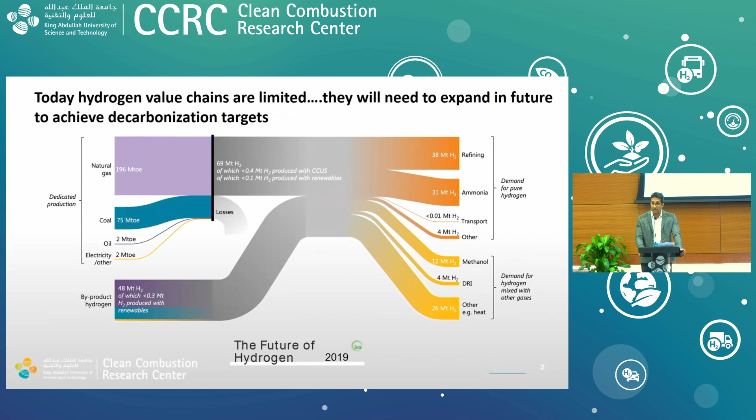In the future though, this ballpark 100 million tons of hydrogen used annually will expand significantly. Today, again 90 to 100 million tons, depending if you count the associated hydrogen with syngas or not, is expected to increase significantly over the next 3 decades, largely due to the need for various economies globally to reach net zero carbon emissions. In the next 10 years, maybe about 150 million tons, but by 2050, forecasts say upwards of 600 million tons of hydrogen. That's a huge amount of hydrogen.

This is the demand sectors where these will be used. Most of it is going to go to mobility - road, aviation, maritime, and other forms of transport - because they are the hardest to decarbonize. Ammonia industry will use slightly more; again this is existing ammonia for fertilizer applications, it does not include new applications of ammonia such as for power. And then things like industrial applications.

In Neom, we're mainly interested in how do we capture the market together with partner companies for the largest demand sectors. So it's going to be mobility, steel, and some industrial applications, not including heat - heat applications are not so much relevant in Saudi Arabia.

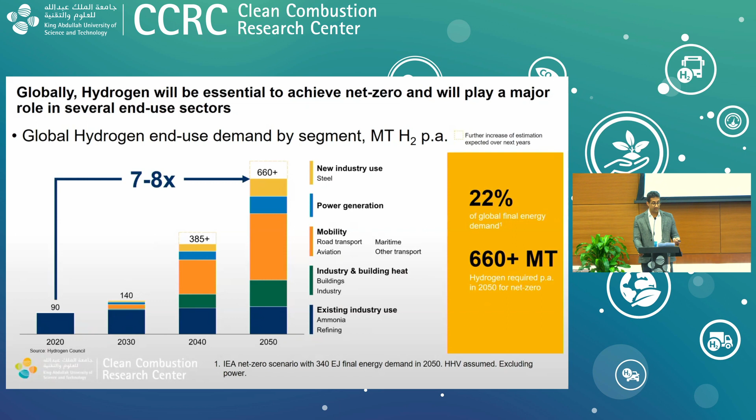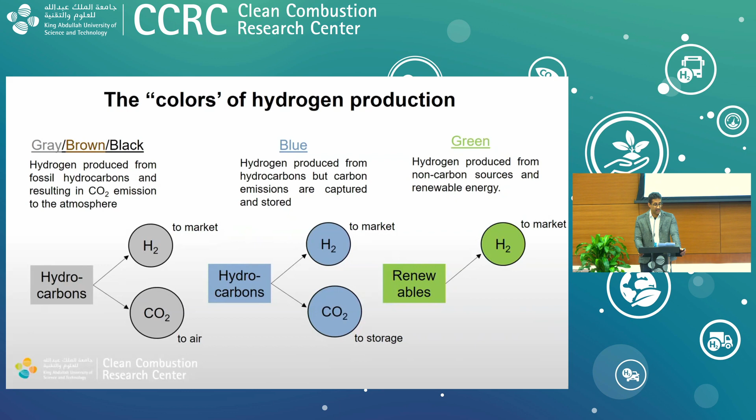But if you use electrolysis with grid power in most countries, which is over 50% based on fossil fuels, the carbon footprint can be double that of just making it from methane. So it really needs to come from renewables, or a large fraction from renewables, to have a low carbon footprint.

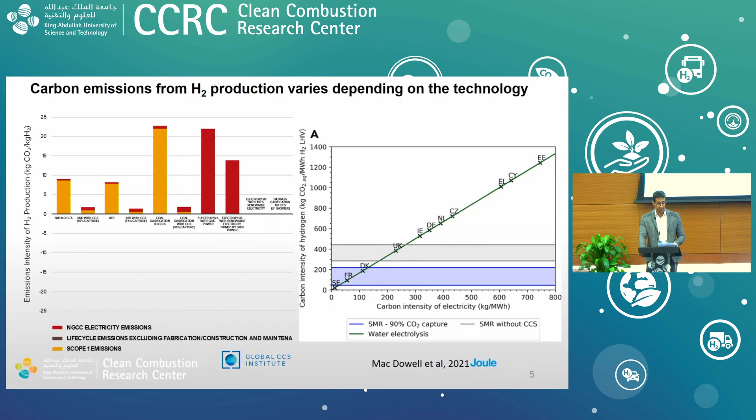So in Neom, the goal is to do water electrolysis with renewable energy, but it is challenging. I work in the technology innovation side of the Enowa business for hydrogen, trying to address the various challenges that need to be overcome for this large-scale hydrogen economy to be a reality. Today I'll just highlight some of them.

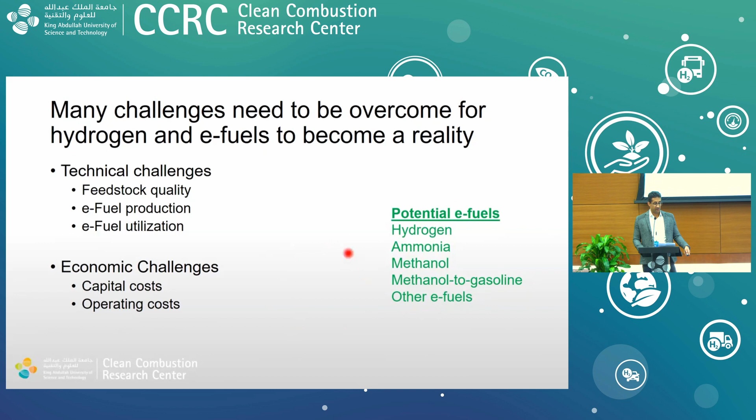There are technical challenges related to feedstock quality. Production of e-fuels is not easy. There are also economic challenges related to capital costs and operating costs. I'll put this all in the context today around transportation fuels, so if you were to use hydrogen, ammonia, methanol, or other types of e-fuels.

This whole area is about the size of a small country, Belgium. The goal is to have something like 9 million people living there in the next 20 years. But right now, there's about 3,000 of us living in trailer parks in the desert.

It was selected because it's a good location, one for tourism, but also for energy. A lot of the Europe-Asia trade routes are within a 4-hour flight away. But then you also have the Red Sea, which is rather pristine in that region, and the temperatures are fairly cooler compared to here in Jeddah or other parts of Saudi Arabia. Key to note is a high solar intensity and high wind speeds.

Actually, just last week they had the Neom Beach Games. It was a World Cup of kite surfing, so it's a very good place for kite surfing if you're interested, because of the high wind speed. Also good for windmills then.

And Neom has to have its own economies: water production, energy production, mobility, as well as many things like sports, food, tourism, entertainment, and digital technologies. My goal is to work in the energy area and specifically on hydrogen.

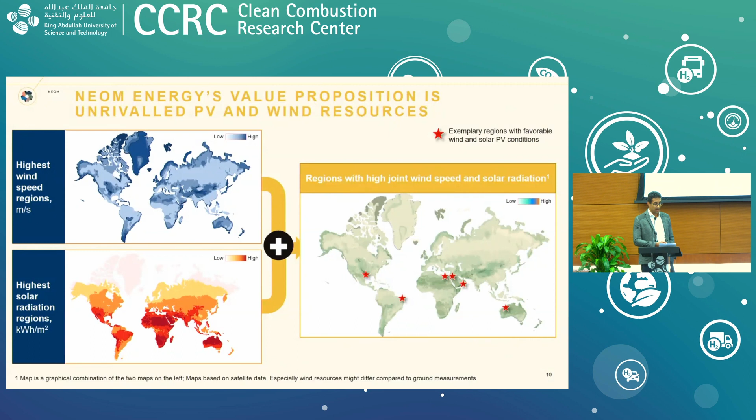So Neom's energy strategy is quite ambitious. They want to be 100% renewable energy. Now, 80% is actually pretty easy and doable. 90% gets hard. 100% is very, very difficult, because you can imagine there's nothing to underwrite whenever the renewable energy is not available. Not only the availability of energy, but how you manage a 100% renewable energy system is very complicated, because consumers always have fluctuating demands down to the second, and renewable energy is not a constant supply. You also need large amounts of backup and excess capacity.

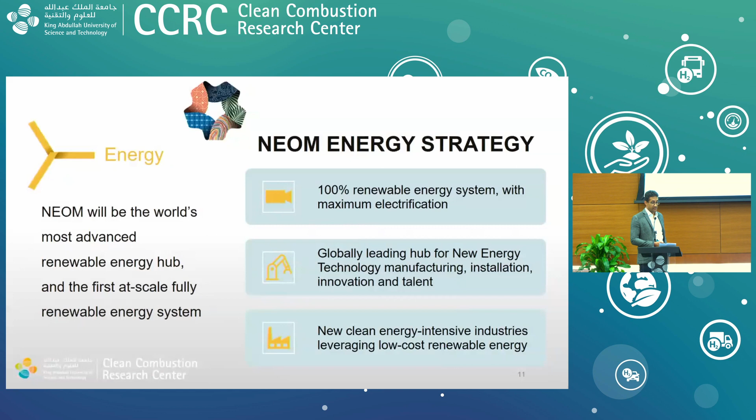Now, we want to use this renewable energy to drive clean energy intensive industry as well.

Enowa is the energy water company of Neom. It's called Enowa because it's energy, EN, and water, WA, and the O is a circle. So it's nice marketing, a circle of possibilities.

Green hydrogen, nature's secret. And as a partner of nature, Enowa is bringing people, industry, and technology together to make the world's first at-scale green hydrogen production facility. In harmony with nature, Enowa will use solar and wind power to produce green hydrogen, which can be used for energy applications around the world, impacting people without impacting the planet. It's possible to change the world and protect it. Enowa, a circle of possibilities.

Okay, so with a good marketing budget, anything sounds great. But of course it's not as easy as making the video. We've got to do real innovation and technology, and scale up to make sure these things are potentially realizable in the future.

In Enowa's innovation roadmap, there are 3 phases. We have large-scale projects like the big green hydrogen project with Air Products and ACWA Power, which I'll talk about briefly. But also we're doing the Hydrogen Innovation Development Center for pilot scale technologies, and then an Applied Research Institute, which is very similar to a research center for hydrogen that you'd find in a university.

Can you give me some water?

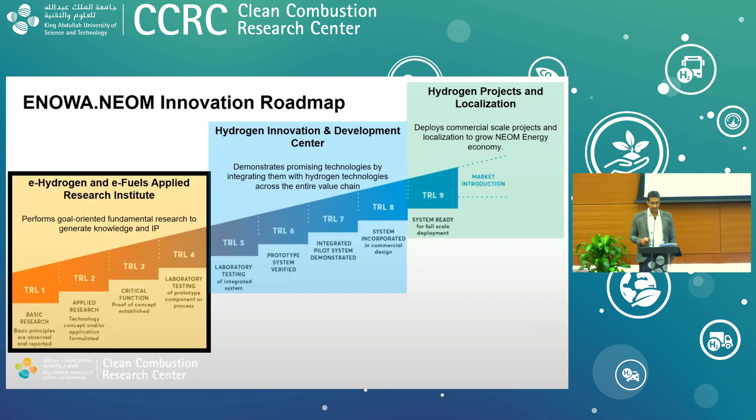So I'll talk about some of the techno-economic challenges around hydrogen production, ammonia, and methanol. Starting with the low cost of hydrogen production, there will be several innovations required to reach the scale needed to get the cost very low. I'll also try to give some rationale for why we select certain technologies for large-scale production today.

Things that us university people like - photocatalytic water splitting, photoelectrochemical water splitting, using bacteria to make hydrogen - these are very low TRLs, and it's unlikely they're going to make a huge contribution to the hydrogen economy in the next 20 years. So when we talk about scale and implementing the economy, we're trying to focus on things that are TRL 7+.

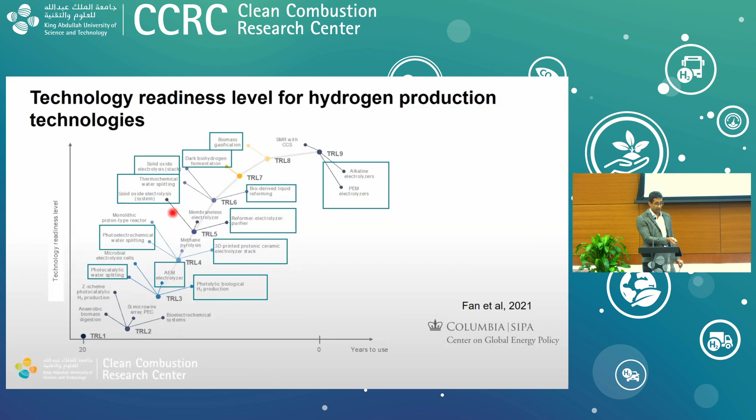Water electrolysis can be done by various means. Alkaline-based systems and PEM-based systems are relatively low temperature - they might operate around 90 to 100 degrees Celsius. Then you have solid oxide electrolysis, which operates at much higher temperatures. The benefit of alkaline and PEM systems is lower temperatures, so you get better material compatibility and you don't need excess heat to drive the process.

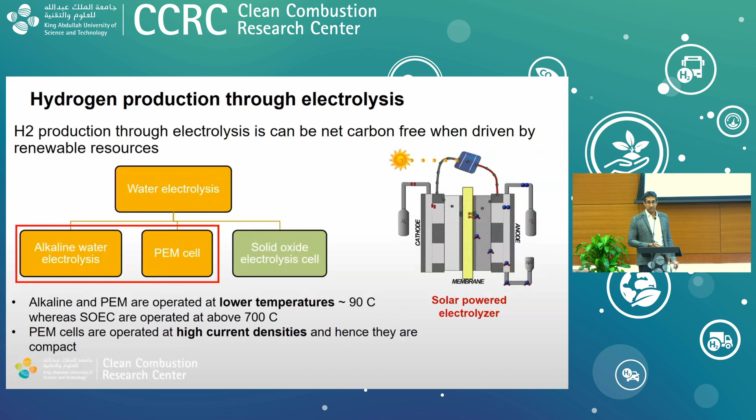With PEMs, you can get higher current density. The benefit of an SOEC, though, is much higher efficiency. So we asked the question first: which technology should we go for - efficiency or scale? This is showing the ballpark efficiency of different electrolysis technologies.

Alkaline is about 70%, let's say 80% for PEM, and upwards of 90% for SOEC. But if I want to go to the market today and buy a good size electrolyzer, the SOEC is less than 1 megawatt, PEMs you might get in the 1 to 3 megawatt range, and alkaline you can buy 20 megawatt systems today. So today, for scale applications, it is alkaline-based systems.

In the next 10 years, the goal is to try to adopt some PEM. SOEC - there are some companies like Sunfire and Haldor Topsoe which are trying to scale them up - maybe they'll get to market in 2035 onwards.

Hydrogen has a heating value of about 33.6 kilowatt hours per kilogram, or 11 meter cubed per kilogram. You can see here why SOEC is just much more efficient: once you cross 100 degrees Celsius, the Gibbs free energy related to water electrolysis becomes lower because now you're dealing with steam instead of liquid. So at 700 degrees Celsius, the delta G is lower, so you get better efficiency.

But it's not only about what you can do to get efficiency. In addition to making the hydrogen, you've got to compress it. Compression of hydrogen using typical industry technology is about 85 to 95% efficient to get to 350 bar. So we're pretty good at compressing hydrogen today, and we're not losing so much in that step.

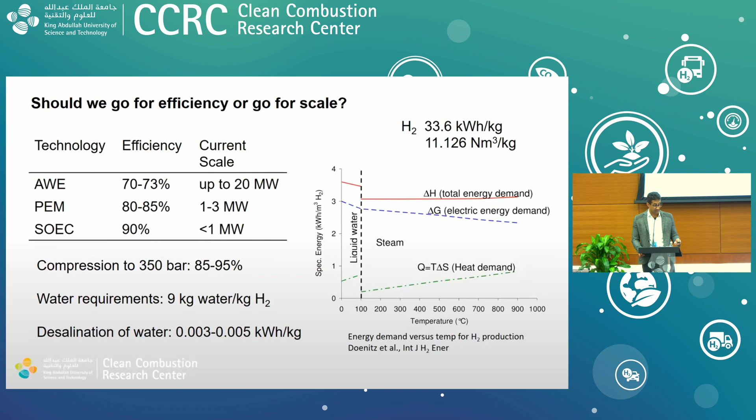So where are the challenges with electrolyzers? It's bubble formation. You're taking a liquid, putting an electrode, and bubbles of oxygen and hydrogen are forming at the electrodes. Those bubbles are leading to reduced surface area for chemical reaction. So what the electrolyzer manufacturers are trying to do is coat the surface so you get better evolution of the bubbles so they don't stick to the surface, or modify the operation of the electrolyzer so you minimize bubble formation.

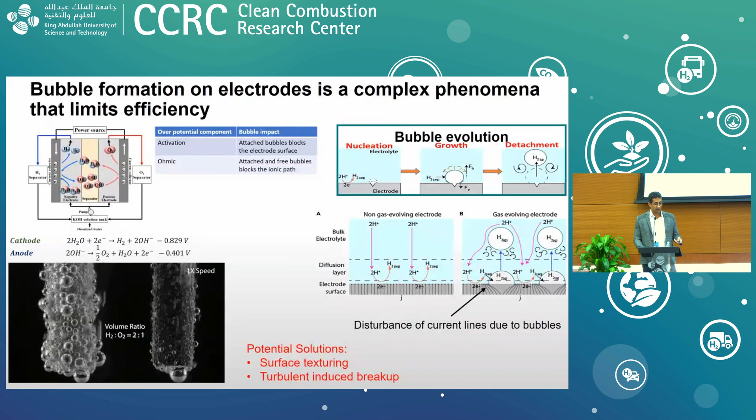In addition, you've got to operate these electrolyzers under variable renewable energy. So there's a lot of interest to find out how to cycle the electrolyzer most efficiently under variable energy conditions.

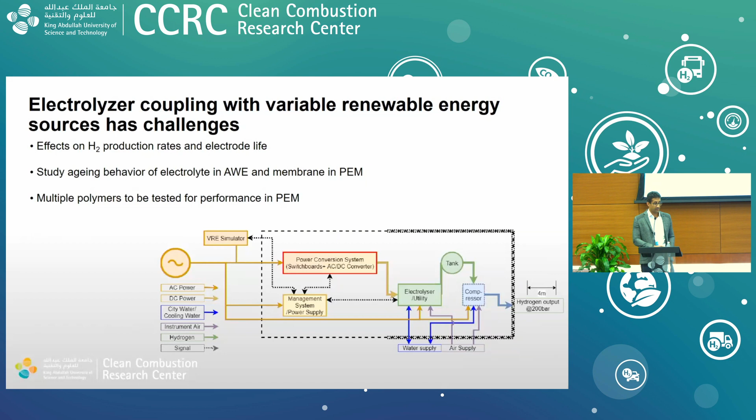In addition, we've got to scale up the manufacturing of these electrolyzers. You need a lot of materials like catalysts, separators, membranes, bipolar plates. So the goal is, today we have about $850 per kilowatt.

But in the next 10 years, the goal is to drive that cost down by about 50%. So it'll come down to about $300 to $400 per kilowatt.

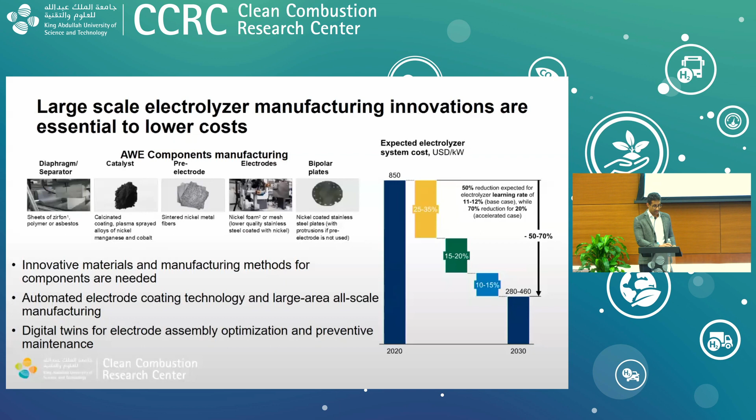Now, once you have the hydrogen, you want to do stuff like make ammonia. Making ammonia is a pretty straightforward process by Haber-Bosch. But what do you do with that ammonia after you make it? Well, you've got to transport it. And in countries like Europe, North America and Japan, they might want to reconvert the ammonia back to hydrogen at some point in utilization.

So for the large scale production of ammonia, industry leaders like Air Products and ACWA Power are joining forces with Neom to make this a realizable project. They've adopted scalable technologies from companies like ThyssenKrupp, Haldor Topsoe, to make it possible to produce ammonia at a very large scale - 650 tons of hydrogen going to make 1.2 million tons of ammonia per year.

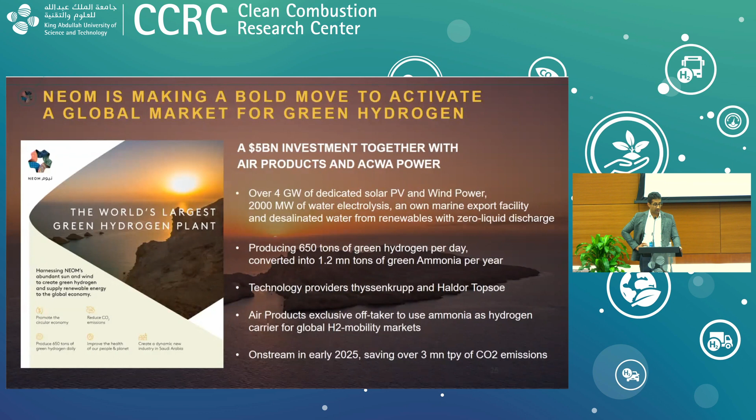Now, once that ammonia is made, it will need to be transported. So this facility will produce the ammonia in Neom - 1.2 gigawatts of wind, 2.2 gigawatts of solar, 2.2 gigawatts of electrolyzer capacity - and then an ammonia plant with some intermediate storage will make the ammonia, which is then put on a ship and sent around the world for markets that want to decarbonize.

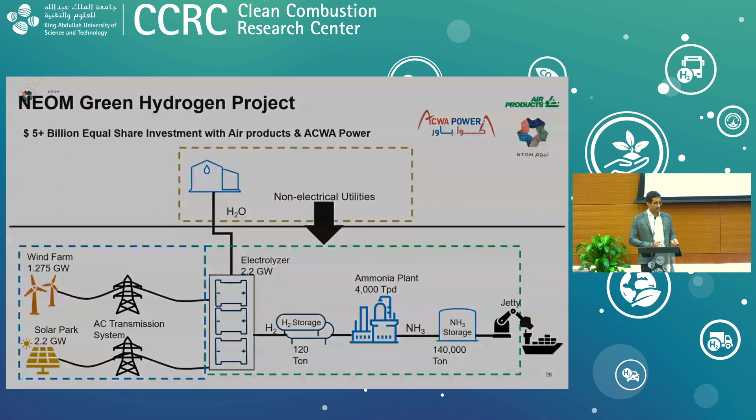Now, the challenge here is - okay, it looks fine here - so if you want to sell this ammonia, or low carbon hydrogen, to Germany, you have to meet their benchmark carbon intensity. Today the EU benchmark is 94 grams CO2 per megajoule, that's gasoline used in an ICE. If you want to meet the RED II standards for renewable fuels from non-biological origin, RFNBO, you've got to get 70% carbon intensity savings, so about 30 grams CO2 per megajoule.

So if we look over the entire process, where does the CO2 have to be saved? Well, first in the production, they'll make it at a pretty low CO2 footprint, about 40 grams of CO2 per kilogram of ammonia. Then you need to transport that ammonia by sea, emitting about 65 grams of CO2 per kilogram of ammonia by ship transport.

It's quite efficient. Then you've got to take it from a terminal, say in the port of Rotterdam, to road transport to a station. You might emit about 90 grams CO2 per kilogram of ammonia being moved. And then finally, you need to crack that ammonia back to hydrogen for a filling station.

And that actually turns out to be a challenge. So the NH3 cracking, of course, depends how you do it. If you use natural gas for the heat of that process, you'll emit about 161 grams of CO2 per kilogram of ammonia. So if you want to decarbonize this process, we need to use something other than natural gas.

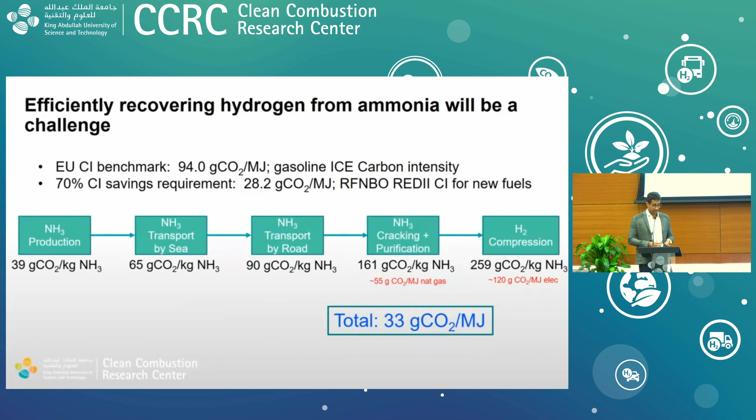If we want to use ammonia for shipping applications, it looks to be a viable solution. This is a chart from the IEA Future of Hydrogen report on total cost of ownership. We see that today ammonia is very expensive in IC engines compared to fuel oil. But in the future, IC engines are expected to be technically viable for ammonia use, and the total cost of ownership could be quite comparable to fuel oil today.

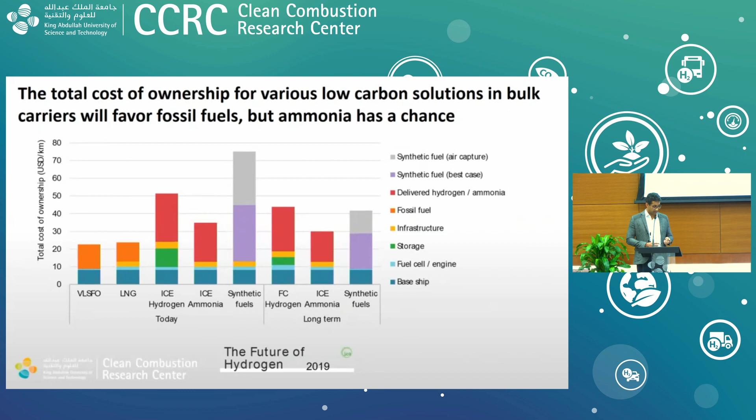Now, what about carbon-based e-fuels like methanol and others? Carbon-based fuels are good for road transport because they have higher energy density than lithium-ion batteries or compressed gases. Methanol has about 4 kilowatt hours per liter, still about a factor of 2 lower than petroleum.

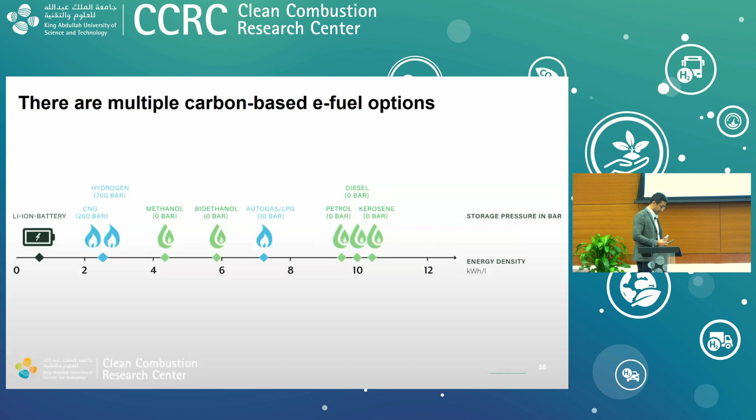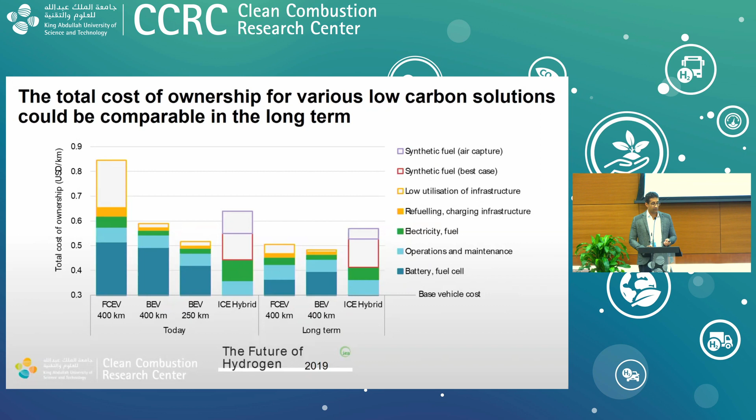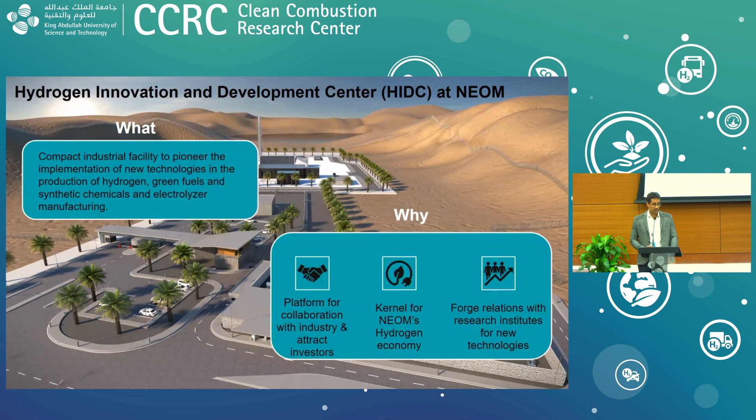That's what we're trying to do at the Hydrogen Innovation Development Center. We're trying to build pilot scale facilities for e-fuel production to show these are viable technologies that could be scaled up. The first thing is to work with industry partners. We're working with Saudi Aramco on a methanol plant, and also with ACWA Power and Air Products for hydrogen production.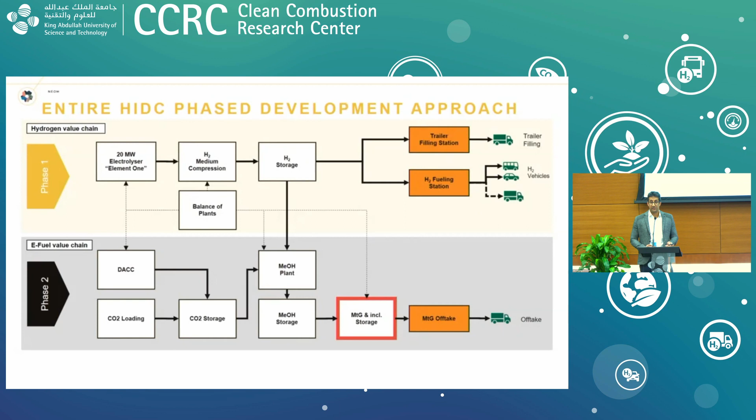This is the overall facility layout. There's phase one, owned by the joint venture, with an electrolyzer producing about 9 tons a day of hydrogen, which is stored and sent to filling stations. Then the e-fuel value chain is together with Aramco, where CO2 is captured and stored on site and used to react with the hydrogen. About 2.5 tons of the 9 tons will go to make methanol, which is then converted to gasoline in an MTG process.

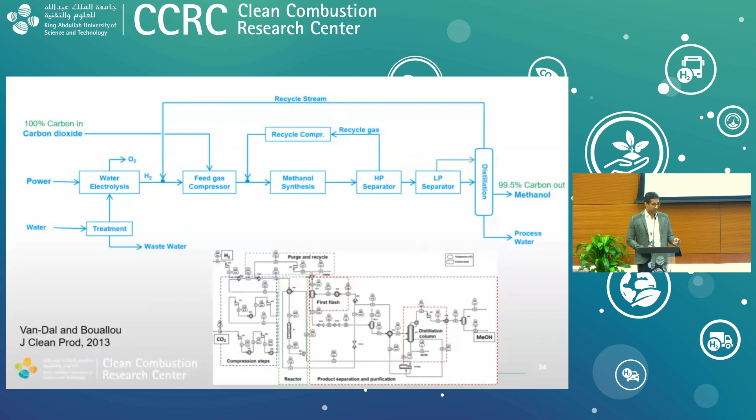The methanol process is shown here. You take power, electrolyze water, and compress the feed gas to about 50 to 60 bar for the reactor to operate, so CO2 and hydrogen at 50 bar. The methanol synthesis reaction happens in a copper zinc oxide catalyst. A single pass conversion is about 30%, so you need a large amount of recycle of the gases coming out, fed back into the reactor. The liquid is separated out and sent to distillation. After large amounts of recycle streams are incorporated, you can get nearly 100% conversion of the feed carbon into methanol.

You also get water as a byproduct. The major capital costs here are the compressors: compressing CO2 and hydrogen to 50 bar, and the large amount of recycle also requires recompression of the stream. Those compressors are about 15% of the overall capex on the plant.

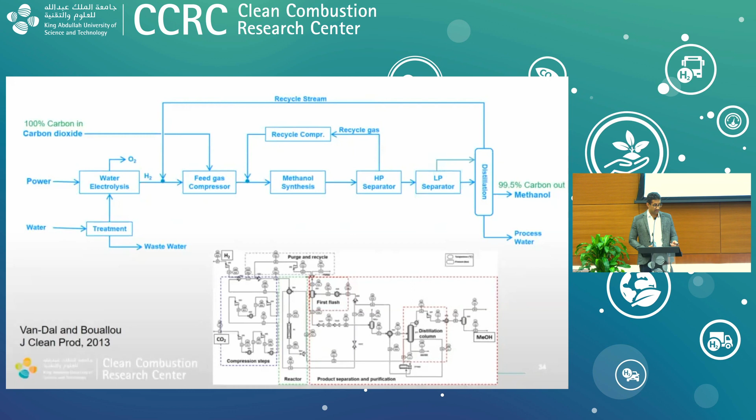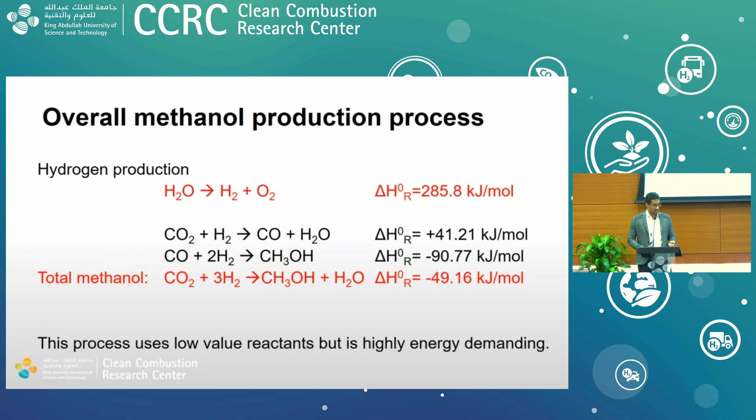Now, if we want to reach an acceptable price of methanol, say $350 per ton, we need hydrogen to be around $1 per kilogram, and we need CO2 at about $80 per ton.

$80 per ton of CO2, if you go for air capture, is very unlikely in the near term. Maybe point source capture could be realizable. If we talk about air capture, it's upwards of $400 or $500 a ton today, and I don't see a roadmap in the next 10 years to get that below 100.

So bottom line here is that we can get hydrogen costs pretty low, but the CO2 capture costs, if we're so dogmatic that we need to stick to air capture for making e-fuels, are going to be a challenge. This is the debate happening now: what is acceptable CO2 for e-fuels?

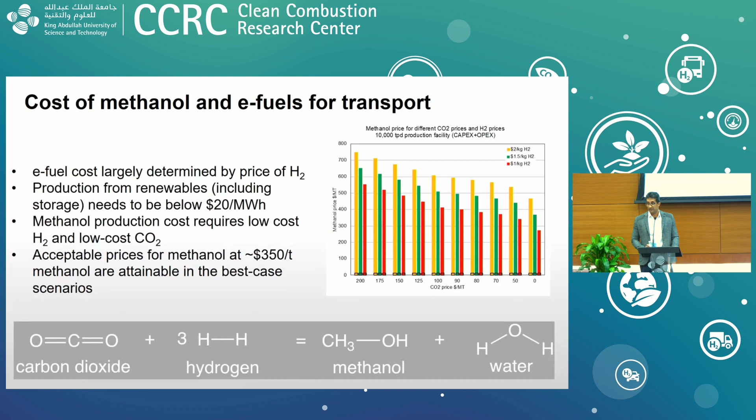If it's from a point source like a cement plant or a power plant, you can easily get CO2 at a reasonable price, $70 to $100 per ton after transportation. But if we need to stick to air capture, it's going to be very difficult to make this a viable technology in the next decade or two.

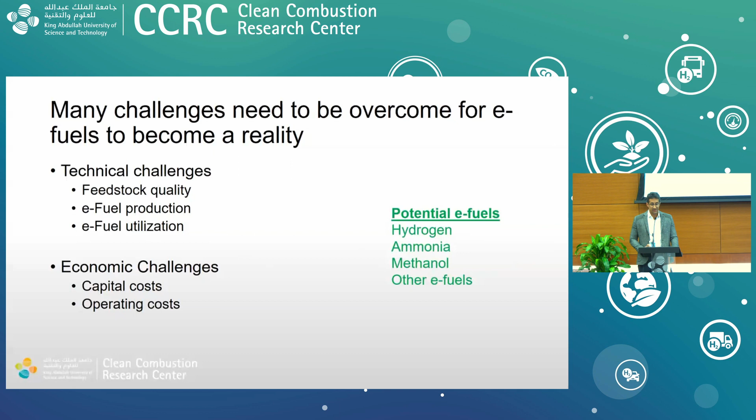So I thought these just highlight some of the challenges that need to be overcome around e-fuels, including ammonia, hydrogen, and carbon-based e-fuels, both technical and economic challenges. But again, I think these are all challenges that can be overcome. None of them are beyond our abilities. So happy to have your questions. Thank you.

Yes, Gaetano. So for the European market, is it more convenient, from an economical point of view, to ship ammonia or use a pipeline for hydrogen directly, given the cost of cracking?

Yeah, there's now discussion in the national hydrogen strategy, and companies like Neom and Aramco discussing the potential for a pipeline. Somebody's got to pay for it, it's very expensive. I think it's about twice the cost of a CO2 pipeline, so about $2.5 to $3 million per kilometer. You've got to go 5,000 kilometers, so it's a several tens of billion dollar investment.

Now, if the volumes are large, it does make sense to go pipeline, but the volumes have to be very large. There's also some geopolitical issues, right? If you have to cross through Egypt and North Africa—I think the shortest route now they're saying is to the northern part of Egypt, then Algeria, and then over to Italy or Greece.